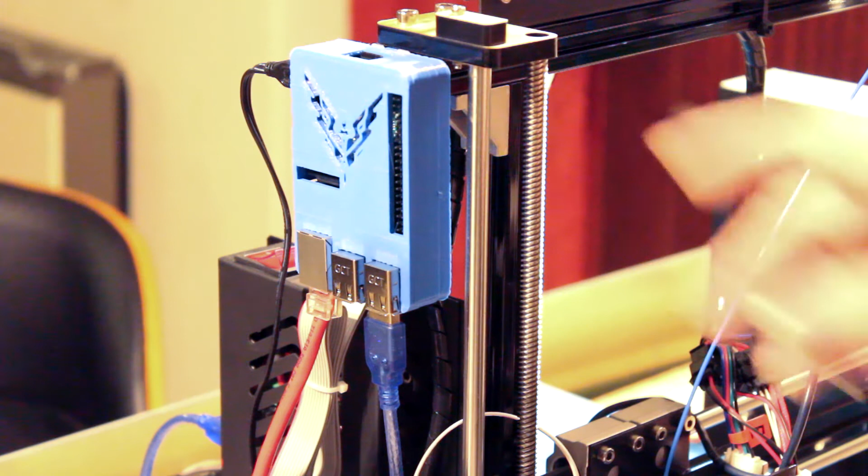Got a network cable attached, USB connecting it to the 3D printer into the control box here. It's nice and solidly mounted. When I get the camera I will put that on there and then I can start capturing time lapse and see what it's doing as well from the office, and I can remote control it anyway. So there we go.

Raspberry Pi case, 3D printed for the 3D printer, and an Elite Dangerous logo added in for good measure.

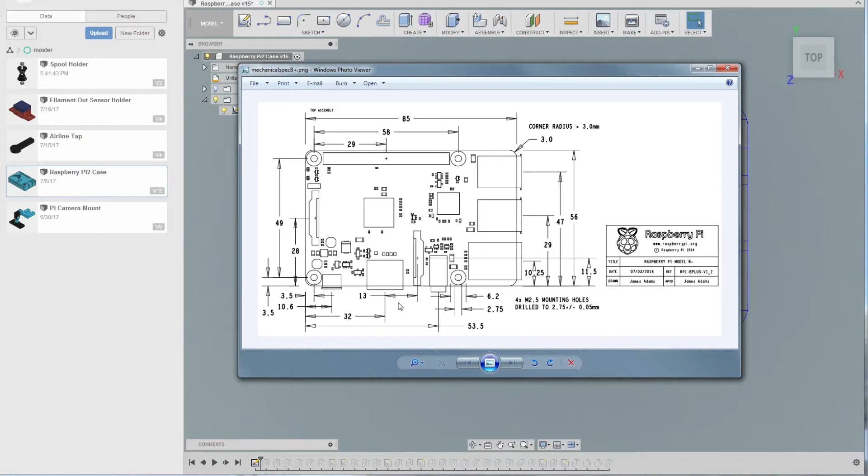So anyway, using that as a guide, we then made a sketch similar to this. Now, I was only interested in a few bits to start with, just to make the base of the Raspberry Pi case, and then we could make the top potentially on another sketch, offsetting it off of this one.

But I did put the I/O part on there, and also the Pi camera slot, ribbon cable slot that sits in this area here, and then we've got our various cutouts for the USB ports, which are in this area here, and the LAN port, which is here, and then obviously we've got our video out, or sound out, and then we've got also the HDMI and the power, and then most importantly, otherwise we'll never get anything running on the thing, we need the SD card slot at the back here.

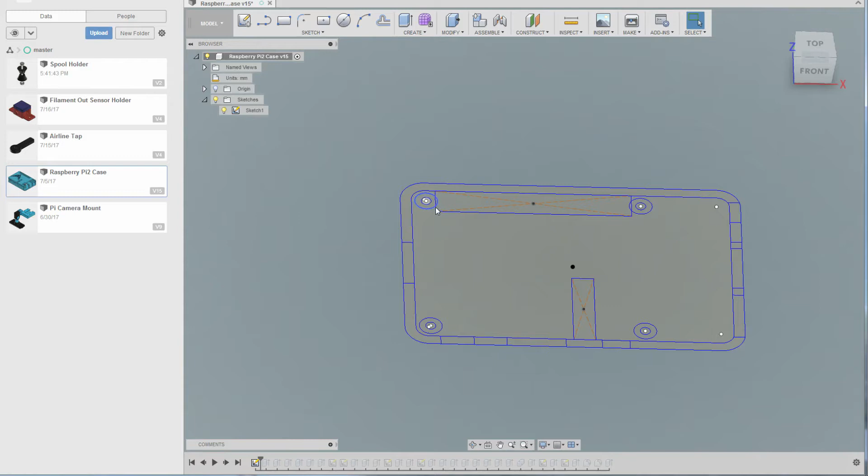So we did that sketch, and all we then needed to do was essentially extrude the bits that we needed. So we extruded a base, and I think I made it 3mm thick. Oh, actually, before we do that, I also left a millimetre all around the edge, just because apparently Raspberry Pi boards are not particularly known for their tolerances, not quite sure why, but anyway, I left a millimetre around the edge just to give us some room, just in case it didn't fit correctly.

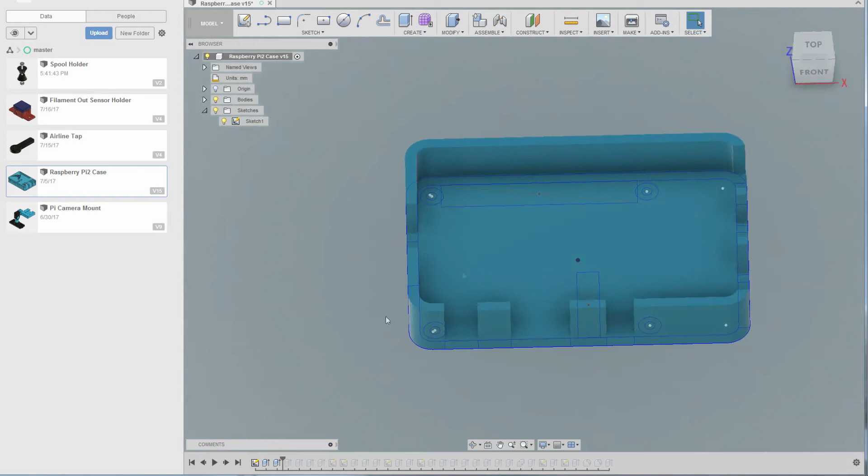So extrude the base, and then we just started extruding the walls that we needed, which gives us essentially our base piece, and it's already starting to look like a case. Then extruded up further for these cutouts on the side for the various ports, bring them all up to the same level there. Then I did some standoffs inside the case just to bring those above, and then we got another sketch in place.

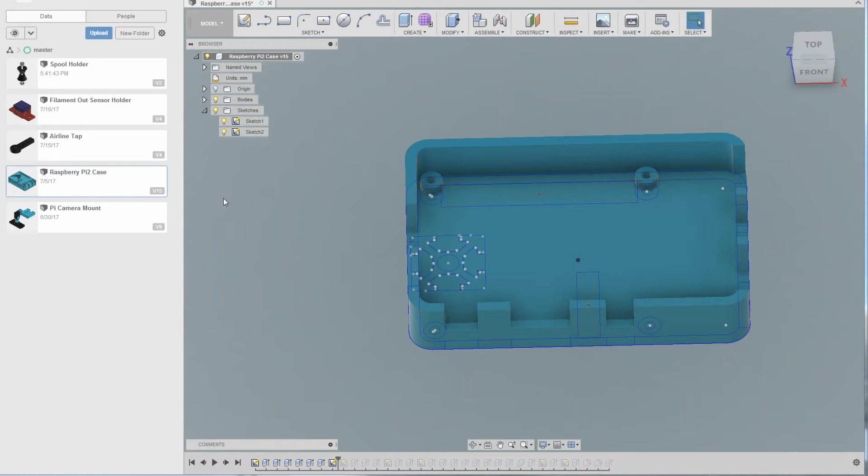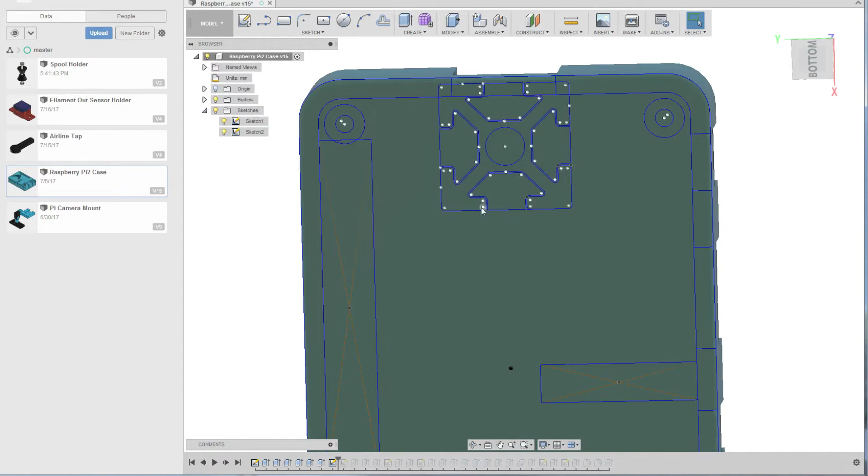Now, you may remember that I did a sketch for the extrusion on my cockpit, if you've been watching many of my videos, and all I did essentially was transfer this over and re-sized it for the extrusion on the printer, because it's the same kind of extrusion, which was really lucky. So essentially did a sketch there. Let me just turn this first one off so we don't clutter things up.

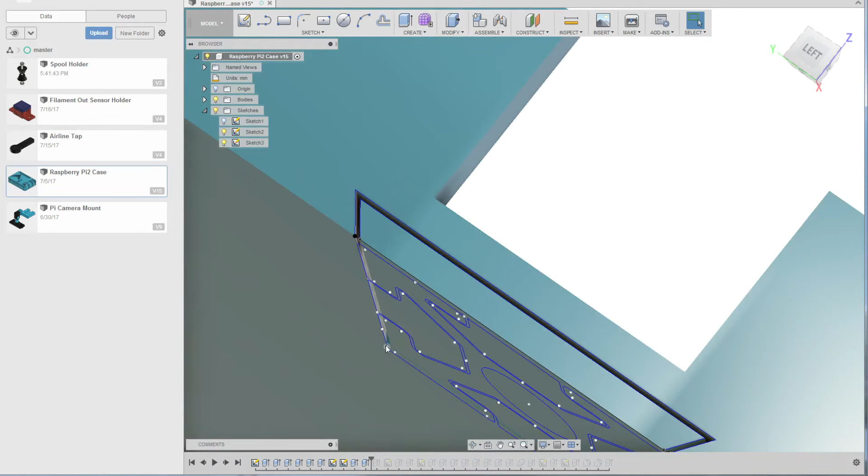And then I did another sketch on this plane here and did essentially a dovetail. So what we'll do is we can extrude the dovetail out here, and you'll notice that the sketch has got some gaps in it so that we can have a bit of tolerance for the printer, so we're not forcing stuff in. Made essentially a new plate inside there, and then extruded up from that plate to match the extrusion on the actual 3D printer itself, and also did a taper when I extruded up.

So one of the options, let's just have a quick look at that. I'll show you that. There you go, it's got a 5-degree taper, so what that means is we can locate that in there.

I'm going to use an M5 bolt to screw this onto the extrusion end on the printer, which means we can essentially tighten this into it and it will get more rigid as it goes in, but it allows us to get it into the aluminium extrusion to start with.

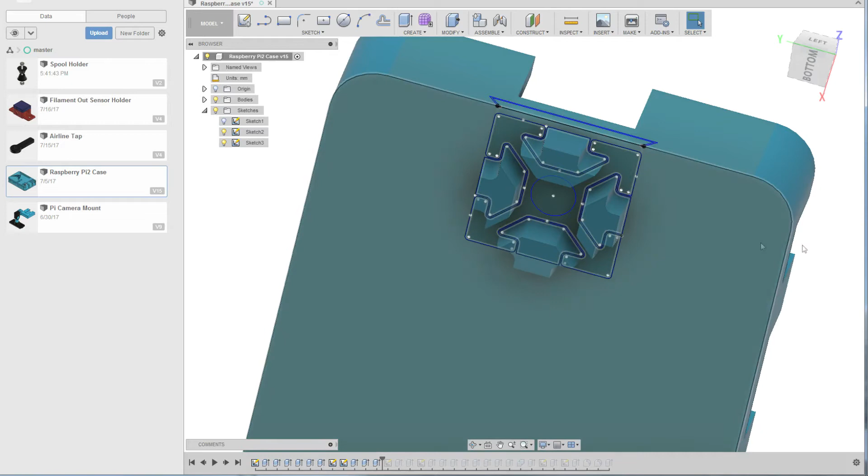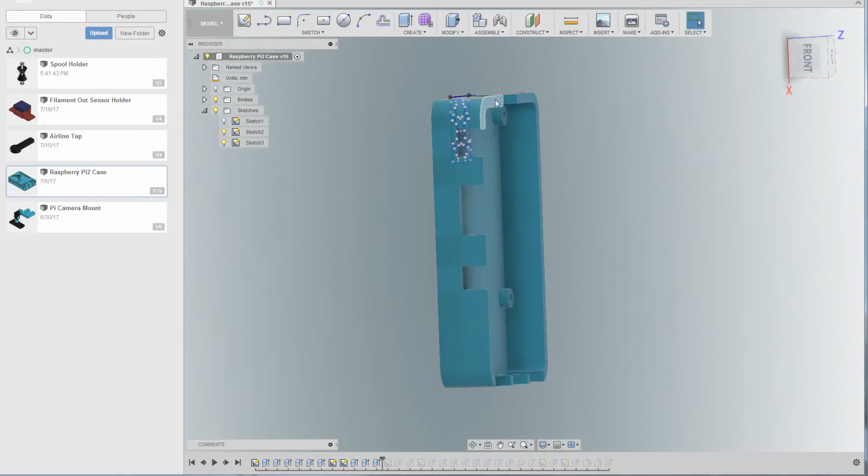Now initially I had the Raspberry Pi orientated like this, and I didn't want to do that because although it looks really cool, it's actually conflicting with the Z-axis on the printer itself, so I had to reorientate it like this. That doesn't matter too much because it doesn't change any of this geometry, since the aluminium extrusion is symmetrical in 2 directions.

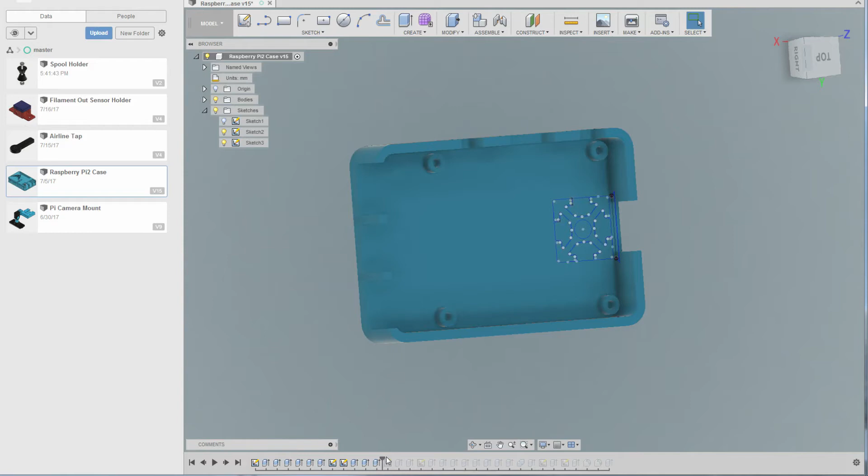It did mean that my logo, which I'll show you in a second, was wrong. Lo and behold, let's do that. So we've got our Elite Dangerous logo, and basically what I'm going to do is cut it into the front and the back of the case.

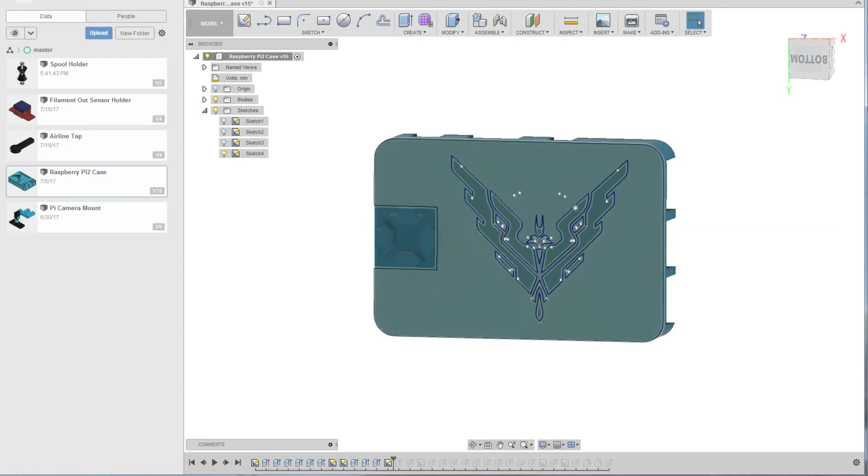I swiped this sketch off of the CNC engraving I did in my acrylic case window for my PC. So essentially I reused that sketch, copied and pasted it in here, and resized it because it was obviously massive when I first put it in.

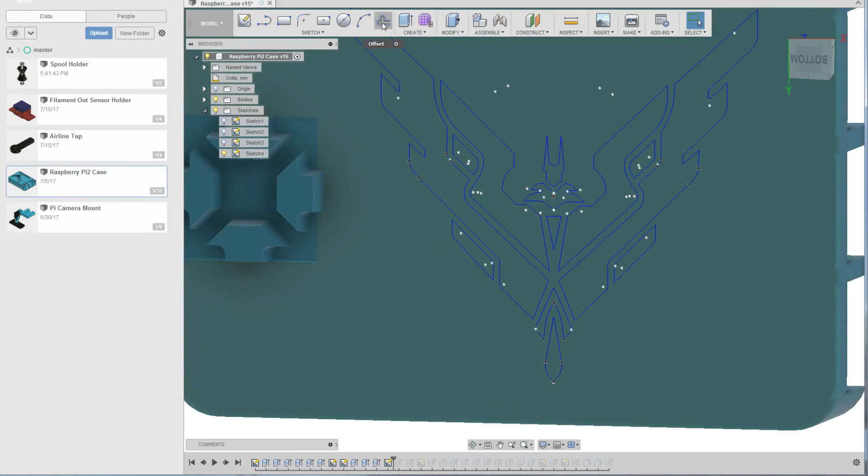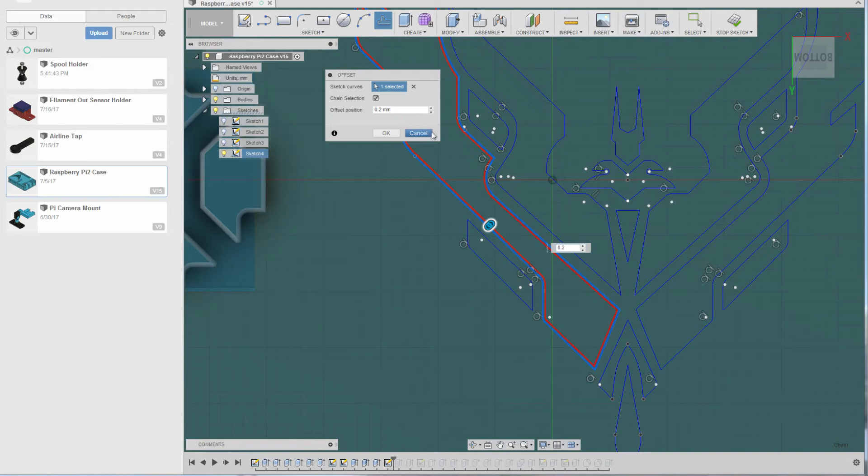Then I had to change a few bits, so I had to run some offsets. If you click O and then edit the sketch, press O like that, and then I think it was 0.2 or something like that, did an offset which just made the holes thinner for the actual logo and thickened up the parts going to these areas here.

Yeah, that area there, because the printer wouldn't be able to print them if they're too thin. So that's one logo done, and we extruded that through as a cut. You can see that looking pretty cool.

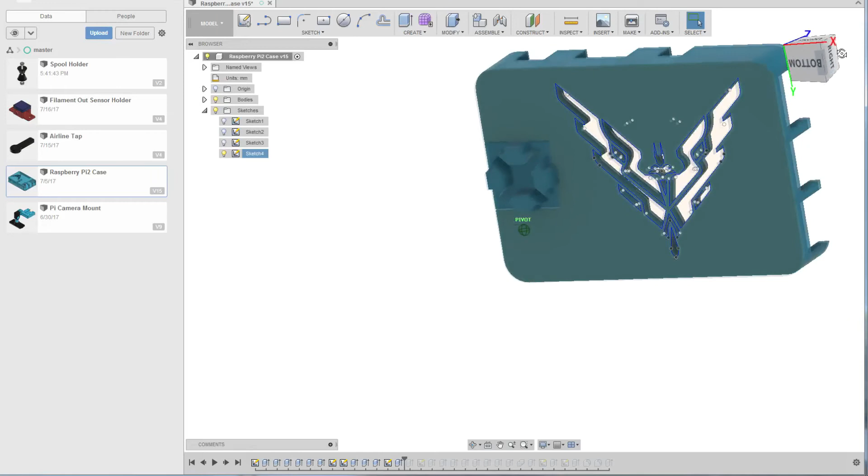Then we did a sketch essentially copying the sketch on the other side, but this time we drew in where the LAN port and the 2 USB ports are going to sit, and also copied over a smaller version of the Elite Dangerous logo here. Had to mess around with this a little bit, because it doesn't want to be conflicting with the I/O or the Pi camera port, which is kind of in this area.

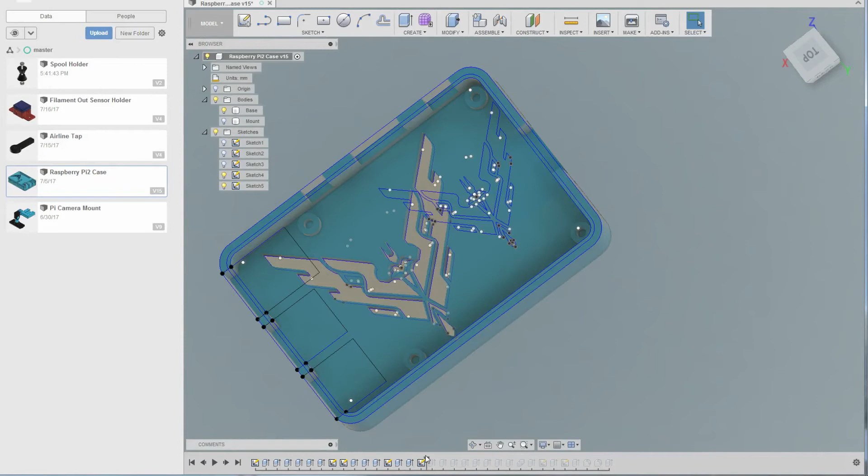So let's just switch that off a second, declutter the view. First of all, just did a quick extrude to make the plate, and that's obviously a new body rather than joining it, otherwise we'd only have a one-piece case and couldn't get a Pi into it.

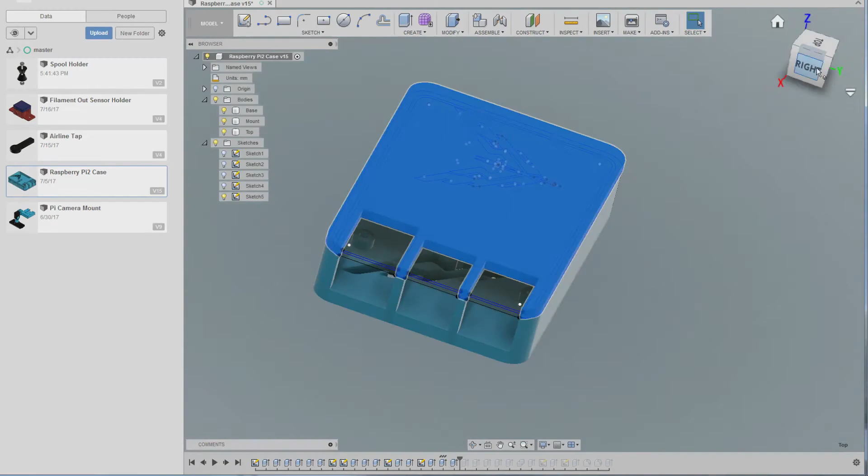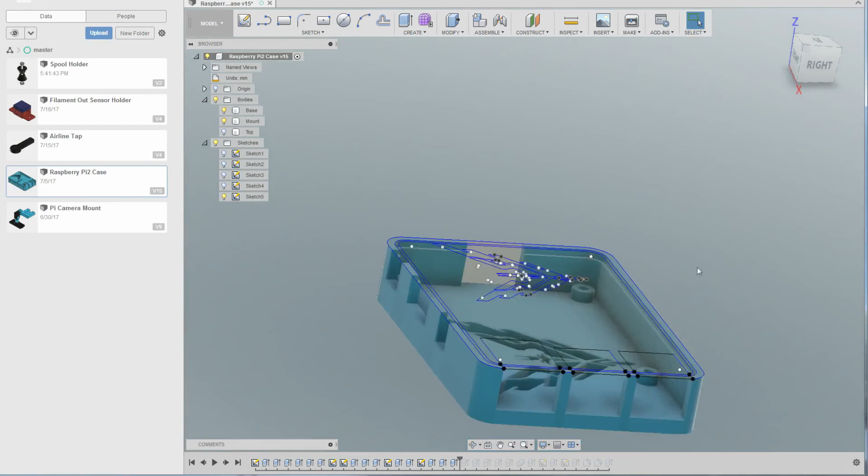Then what I did is extruded the bottom. This extrude here then extrudes this lip down so that the top can locate on the base, and also did a corresponding piece there, and you can see this ledge here around there, so that means the top can then essentially snap into the base, and it should just clip together because the tolerances are quite tight on it.

So that's that piece done. Then it was a case of extruding, cutting for the I/O and the camera port, and then finally we extruded out and cut our Elite Dangerous logo out.

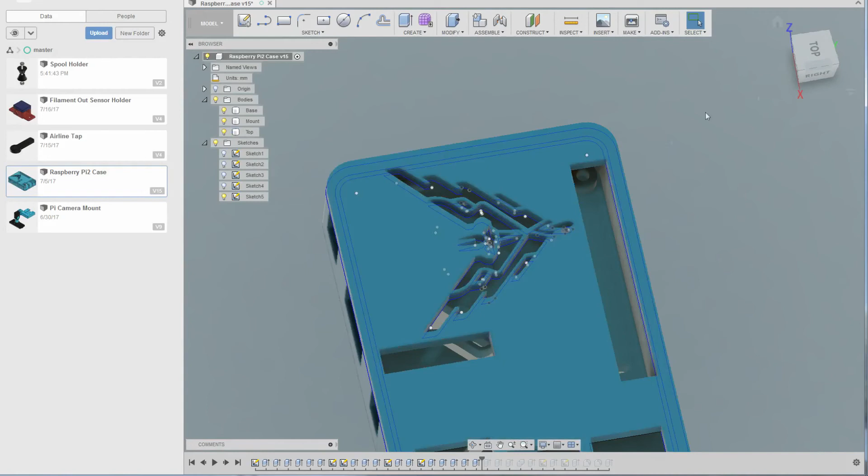Now of course that logo could be anything on there, but I thought it was quite fitting considering David Braben, who is the CEO of Frontier Developments, is also, I believe, one of the founders of the Raspberry Pi Foundation, which developed and got the Raspberry Pi out onto the market. So I thought that was fitting.

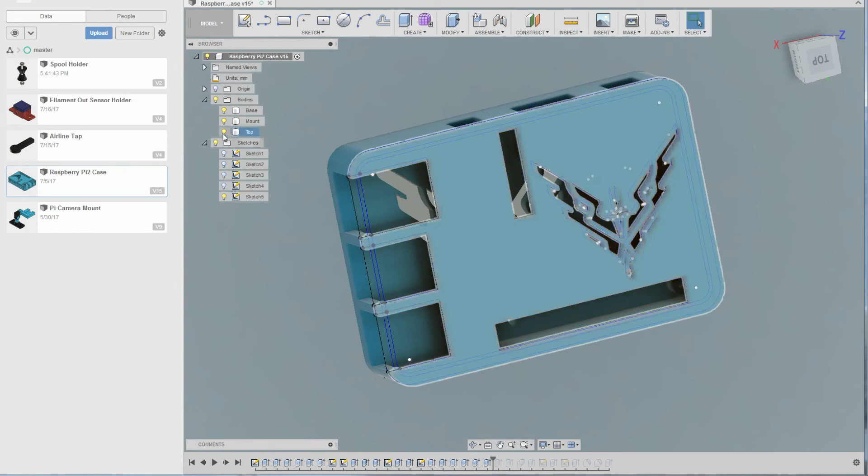Okay, then what I needed to do was cut the hole in the bottom of this. Let me just get rid of some of these sketches. There you go. So I needed to extrude a hole through the mount, and also needed to go through the body, so we've got a couple of extrudes there.

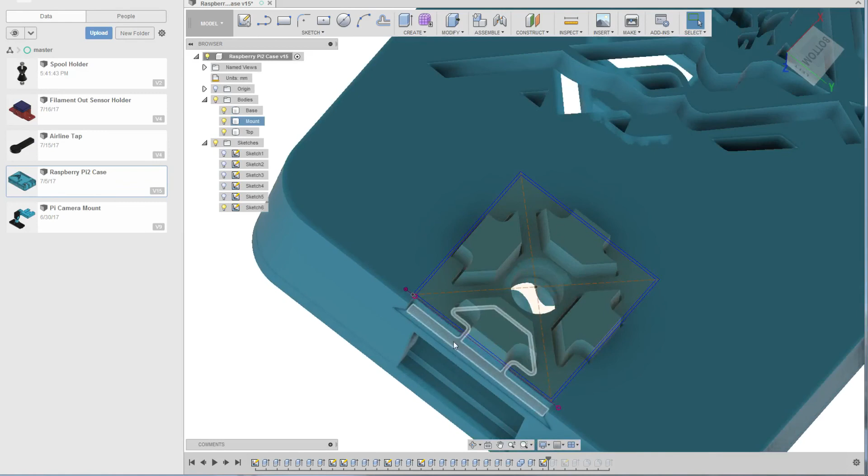Then we needed another sketch, and that was just to provide us with a lip, because actually what I needed to do was deepen this a little bit and make this dovetail thicker, make the base thicker, because it was a little bit flimsy after a test print of this.

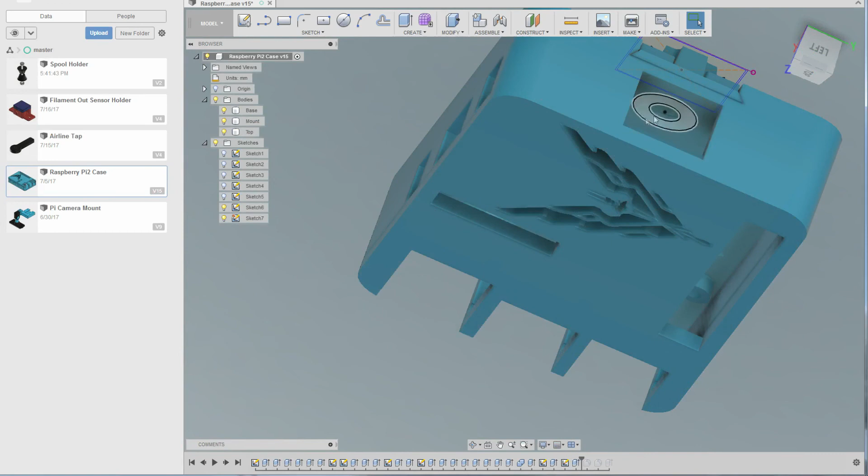So I just redesigned the mount a little bit, and then did another sketch on the bottom here to cut a bigger hole and do like a big chamfer into it.

There you go, so there's like a big countersink in there, because the M5 bolt has obviously got to screw deeply enough into this countersink that it's not going to touch the bottom of the Raspberry Pi, otherwise it might short something out.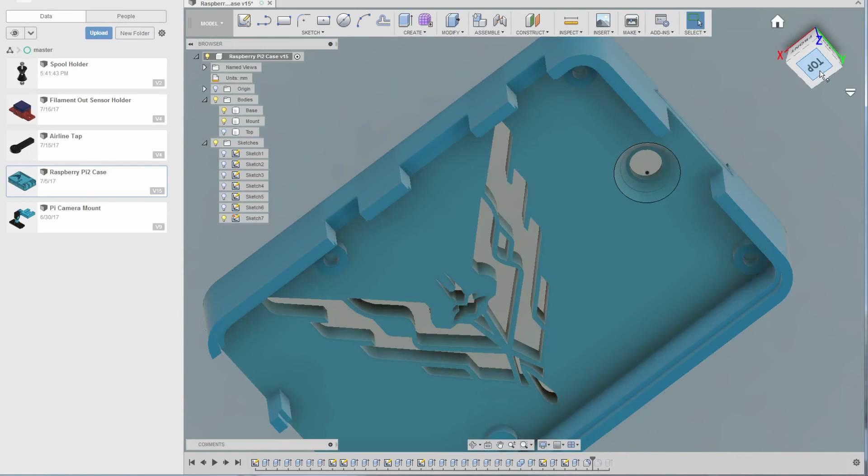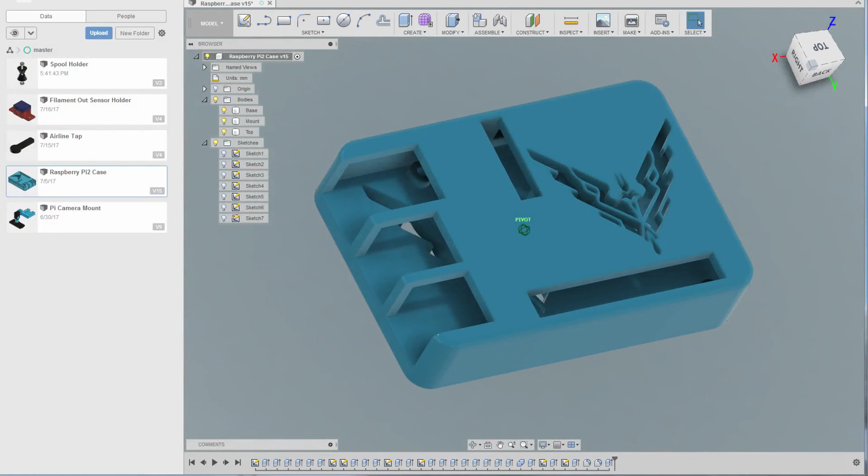Then we used a bit of chamfering and filleting here and there just to round off the corners of the piece on the top, give it a nice rounded appearance, and again at the bottom. So there we have our case, and then it was just a case of, excuse the pun, printing it out and mounting it on the machine.